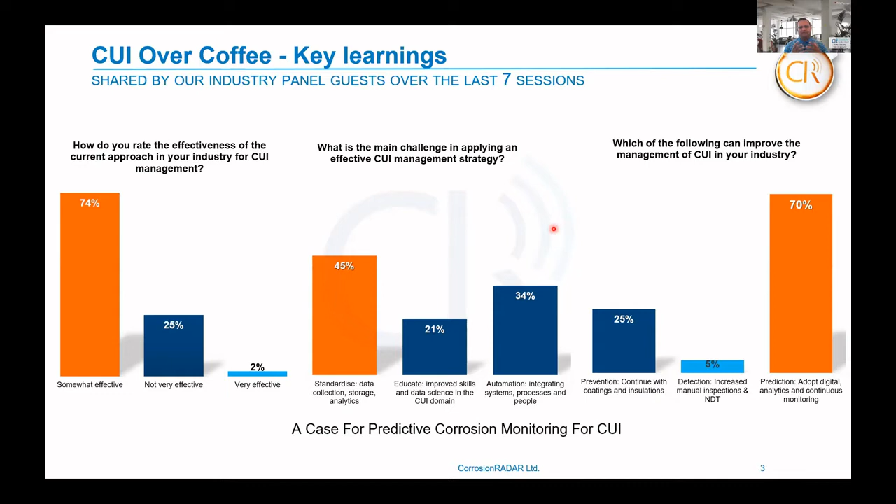So next slide talks about whenever a new paradigm comes in, innovation happens. So I thought this slide will talk about, are we into early majority or early adopters in predictive corrosion management? Has predictive corrosion monitoring for CUI finally crossed the chasm? Chasm is a gap between an innovation and early adopters and early majority. So have we crossed this chasm?

So I would request Shiraz to actually talk about adoption, how we are seeing the adoption of CUI monitoring and predictive CUI monitoring. Have we crossed the chasm? Are we about to cross, or are we in the early majority or early adopters? So that's what we will discuss today, a case for predictive corrosion monitoring for CUI.

So with this, it prompts me to ask Shiraz a question. Shiraz, there has been so much discussion around this topic of CUI and monitoring and prediction. Some people feel that it's at the early stage right now, some people feel that it's been adopted. Where's the line? So I would like to ask you this question, and through some slides show to the audience, where are we on CUI monitoring and prediction? Has it been deployed? Have there been cases studied, and how is the adoption going on? So Shiraz, over to you with this question.

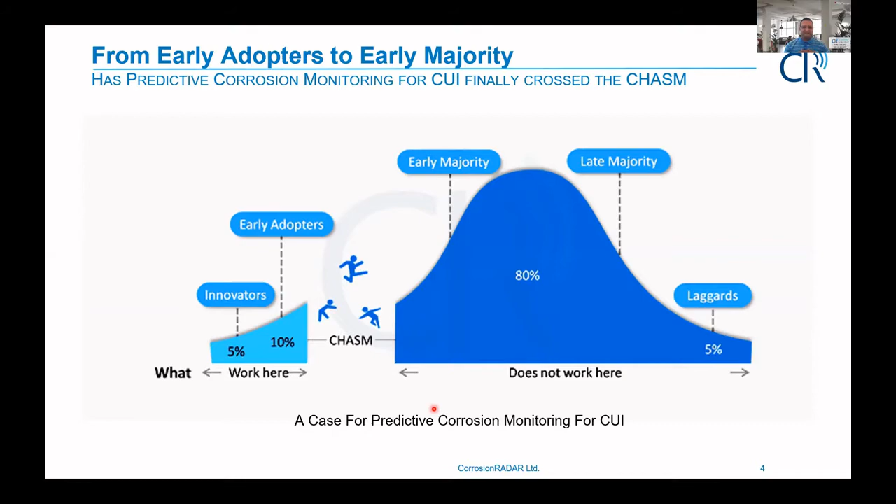I think we have - I can't hear Shiraz. Shiraz, are you there? I think the mic is muted, Shiraz, so you may unmute it.

Thanks, Praful. Yeah, I'm just going to share my screen. I prepared a couple of slides to exactly answer your question. I hope you can see my slides. Adoption, especially for CUI - I think it's time for adoption. The industry has been suffering from CUI for a long time. We have been using the same process for over decades, and I think now it's the right time to use a new approach.

So to start, I would like to share with you a story. Probably some of the audience here will recognize themselves; some of the panelists will recognize themselves in this story. It's a very simple story that happens probably every day all around the world, where you have Rob and Bob in a refinery or plant talking about CUI. So this is how the discussion goes.

So the boss asks his inspection manager, Rob, what is the biggest asset integrity issue? Rob, of course, answers, it is corrosion under insulation. Then Bob, again, very surprised - and this happens all the time - says, 'Oh, I mean, we have coatings with 20 years lifespan, we have good insulation, reliable NDT, good RBI practices, and we're still talking about CUI problems.' And Rob said, 'Yes, Bob, CUI management is still very difficult with limited budget and resources.'

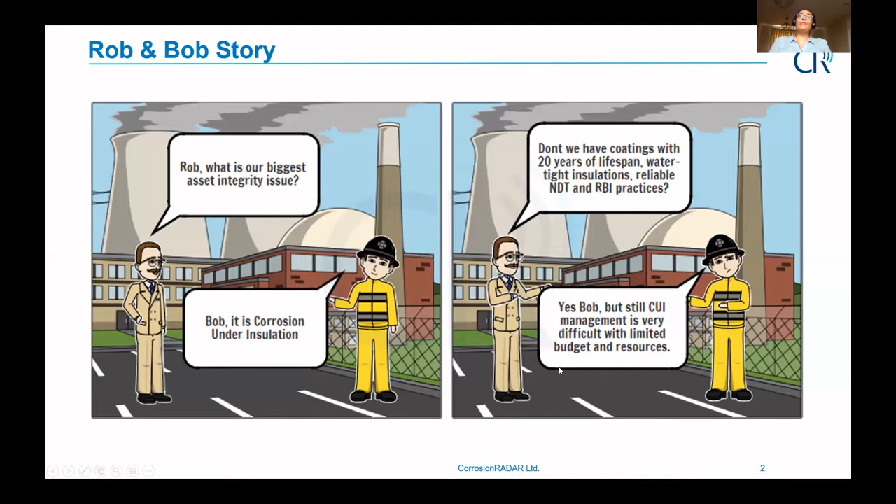So this just captures the problem that we see every day in the industry dealing with CUI. And just to support that with some numbers: CUI is the number one asset integrity issue in oil and gas and petrochemicals, and 60% of pipeline failures come from CUI. This is from public information, but also some of the panelists we had during the 'CUI over Coffee' sessions also mentioned big numbers like this. And just to take, for example, offshore platforms - 10% of the overall maintenance budget goes to CUI. So CUI is a big problem. Corrosion in general is the biggest failure mechanism, and CUI particularly is a big problem, and it is time to do something about it and adopt a different approach.

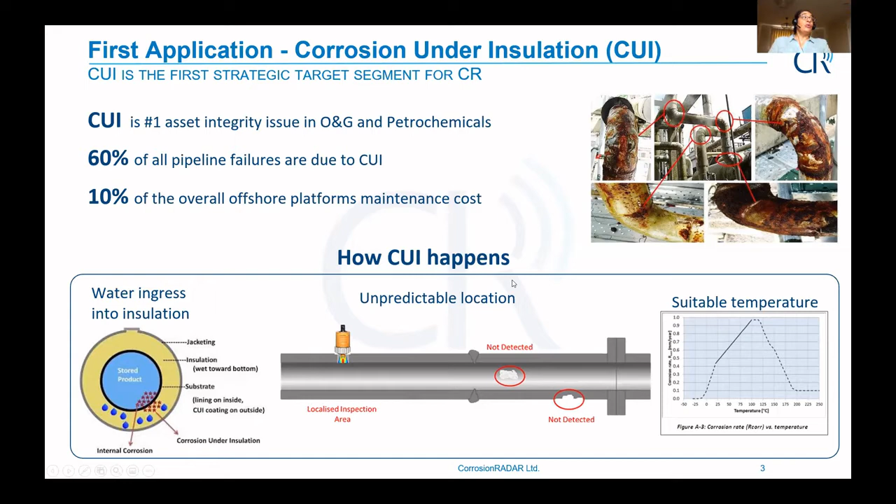So why is it the right time? Because I think the inspection, NDT, and monitoring technologies are ready to support this new adoption and new move. So I'm going to take you through a little bit of history of inspection.

This is a CorrosionRADAR slide, what we call inspection 1.0 to inspection 4.0. We classified how inspection has evolved over time. Inspection 1.0 is when we used manual observations and leak detection. It's very, very basic.

Then it moved to inspection 2.0, when we had a little bit more development in the instrumentation tools we can use, still heavy on visualization. Then it moved to inspection 3.0, which is more based on statistics, RBI, risk-based inspection. And now it's the era of inspection 4.0, enabled with technologies to move to automation, more predictive and analytics-based inspection.

That helped us move from manual to automated, from detection to prediction, and from reaction to prevention. It is the right time to adopt a new way of dealing with maintenance, specifically CUI maintenance. And that is exactly what we are doing at CorrosionRADAR.

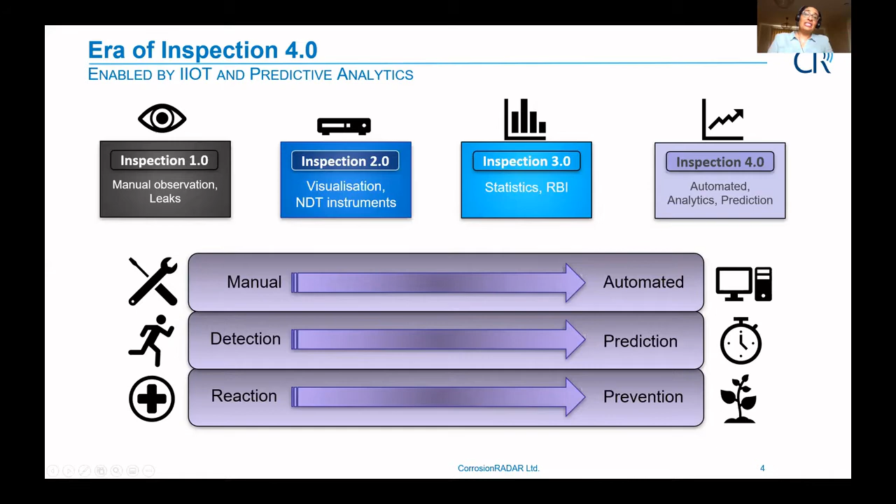We are supporting and enabling this move to asset digitalization and CUI management digitalization, through a system or solution that has three parts: what we call detect, connect, and predict. Detect is based on the hardware.

It's a number of sensors that we offer, developed in-house. We have corrosion sensors, we have moisture sensors, because moisture is the biggest problem that leads to CUI — moisture trapped in the insulation leads to CUI.

But we are also working on other types of sensors for coatings, and other sensors to enable us to detect, prevent, and predict how CUI can develop in different types of assets.

Then connect — as I said, this is inspection 4.0, so we want to make the system wirelessly connected, for remote inspection. And predict is really how to use all this valuable data we get, in order to move from reactive to predictive CUI management.

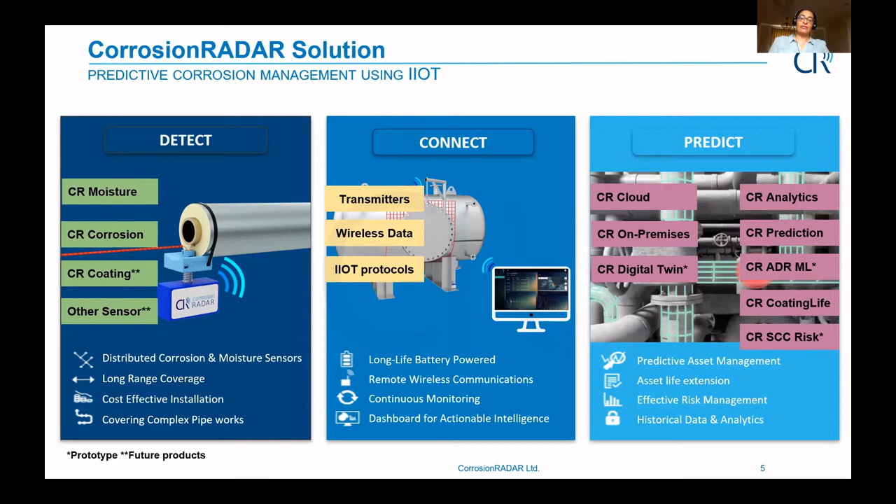So this is how a typical CorrosionRADAR system may look on a type of asset. It is modular. It can be installed on pipelines in a coiled configuration, helical configuration, or straight line — for example at the 6 o'clock position, where normally water settles in.

It can be designed in a mesh configuration if we're dealing with a big surface area. So it's very modular and flexible. It is designed to really give you two very valuable pieces of information: where and when CUI is happening. So you have a risk profiling of your assets, and a condition-based inspection, rather than blindly going every cycle to strip the insulation and do the inspection.

At that time, it may be too late, it may be too early, and in both cases it's a lot of cost and risk involved.

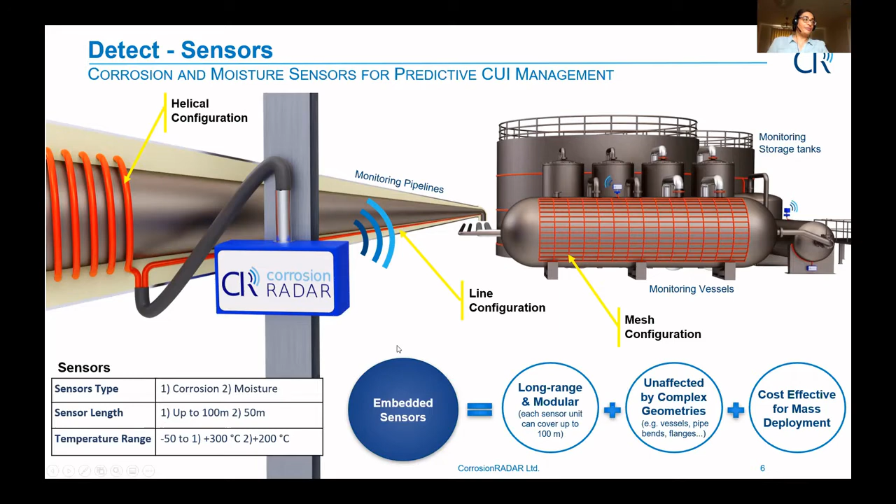Here's a very typical case where this is a brown field — the system can be installed for brown and green field. This column suffered a lot from CUI in the past, and during a turnaround, the client decided to adopt a new way of doing things, saving costs and also increasing safety.

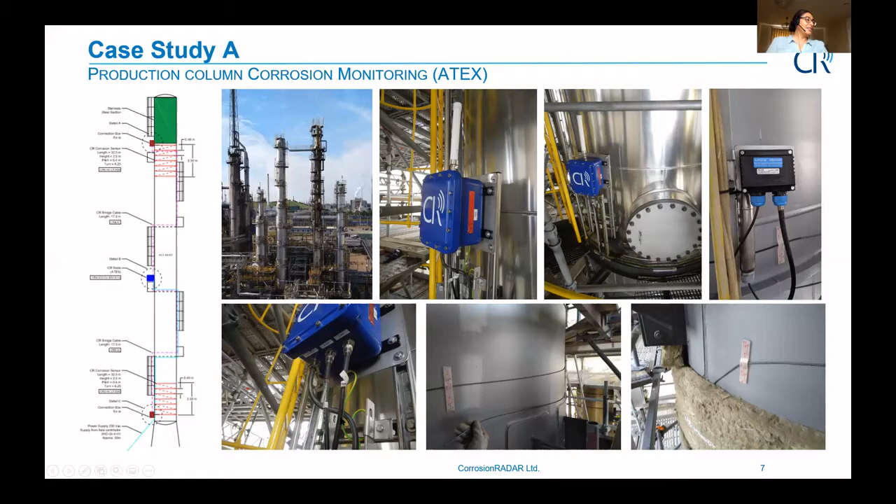My second example — if I can move the slide — is again a brown field. This is a complex pipe network where a section of it has suffered a lot from CUI.

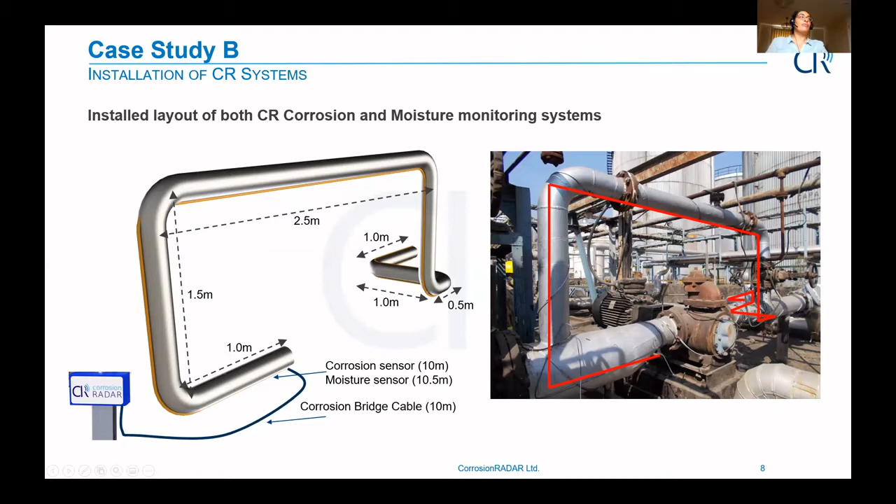The client decided to install both corrosion and moisture sensors, and I will show you in this slide the results from both sensors. So after 9 months of installation — the assumption here, of course, is that you have the best coating and the best insulation.

But after 9 months, we have seen, if I take the moisture sensor results — if you could see where I'm pointing here — that on that pipeline we have detected the presence of water pretty much everywhere in the pipe: on the top, and in the low points where the water settled in.

And if we also analyze the corrosion data, we have seen that at the top of the pipe, we have started seeing a level of CUI, and also at other points, lower points in the bend, we start seeing a level of CUI. So the key learning here, when the pipe has been coated and a new insulation has been put, the assumption from the client is that we will only inspect this pipe after 5 years. What we are showing them with real data is that within the first year, you have pretty much water everywhere and a CUI process has started.

So maybe if you wait for the next 5 years, maybe there is no pipe left. What we are trying to do here is give data for more informed, data-driven decisions. So the decision could be to prevent this altogether and reseal and look closely at the insulation, or shorten the inspection cycle from 5 years to 2 or 3 years. This is to prevent and to predict how things can evolve, for the client to make decisions based on real data and prevent a lot of cost for repair and safety problems and unscheduled shutdowns if CUI really leads to that point. So these are my slides to answer your question, Praful.

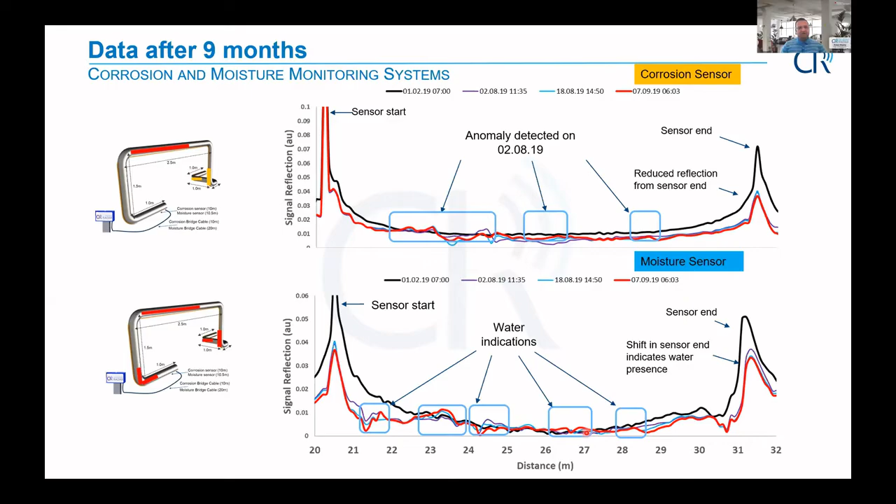I hope that covered all the questions that you asked me. Yes, thank you, Shiraz, for sharing that, how CUI monitoring has been getting adopted in various assets. My takeaway from this is, yes, this is happening, and I will question about where are we in the chasm of CUI monitoring adoption, and that will be a question to you.

And when you talk to various end users, oil operators, what are the main assets where they see the usefulness of this, and what is the plan in their mind? How does a typical process adoption start?

Yeah, Shiraz? I think that there is a big awareness that CUI is a problem. The question is, is there an appetite to change it or not? That will categorize the company into two categories. Some companies are really proactive about it, because CUI is a long-term problem. Some, they see the short term of it - okay, it's not my problem, it may happen in 5 years, it may happen in 10 years, I'm not going to be proactive about it.

But we see more and more companies really willing to change this because they realize a lot of aging assets are suffering from this problem now as we speak. And there is more appetite to take a different approach.

Aligned to that is all the development that has been done in the digitalization world - better sensors, better ways of transmitting data wirelessly, better signal analysis techniques that have been developed. So all those enabling technologies make the adoption cheaper, hopefully, than comparing to what it was 10 years ago. And we see more and more appetite to do that.

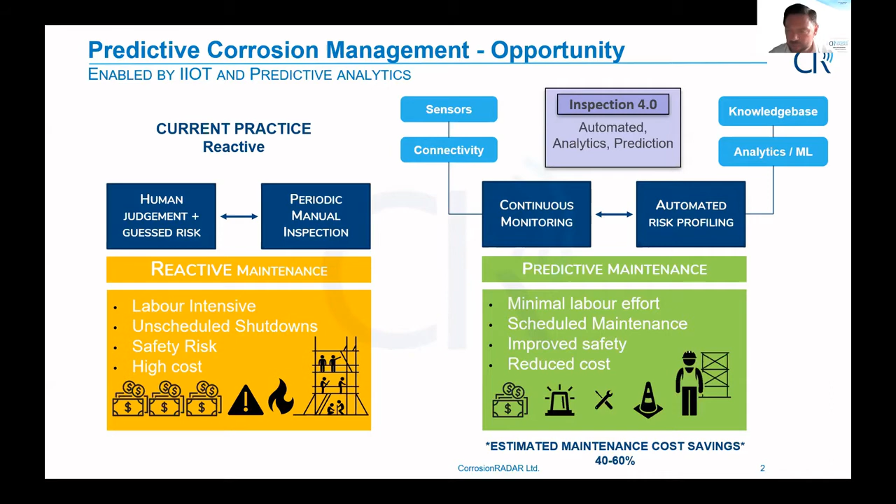And if we move on to targeting the actual business cases - we've talked to many operators and different people within plants, and what we've got to do is we can't just put sensors everywhere. It's not a big bang approach; we have to be highly targeted and prioritized. Fran from Plant Integrity Management, in one of the CUI coffee sessions, said we need to look at the fabrication and maintenance strategies, and the risk-based inspection tools, to define where we start putting and rolling out the sensors.

And when we're talking about brownfields, we are retrofitting the installation, so we need to work around those schedules, but it needs to be highly prioritized. So what we are seeing, and Shiraz mentioned a couple of customer cases, is companies focusing on high-value and critical assets like production columns, where it's difficult or costly to inspect or need regular inspection. Of course, conditions are a big factor too.

We're talking to plant owners and people in those plants who recognize that due to various different conditions, it's really driving the unpredictability associated with CUI. So we need to think about where we target the business case analysis and where we target deployment of sensors. We talk about green and brownfield sites.

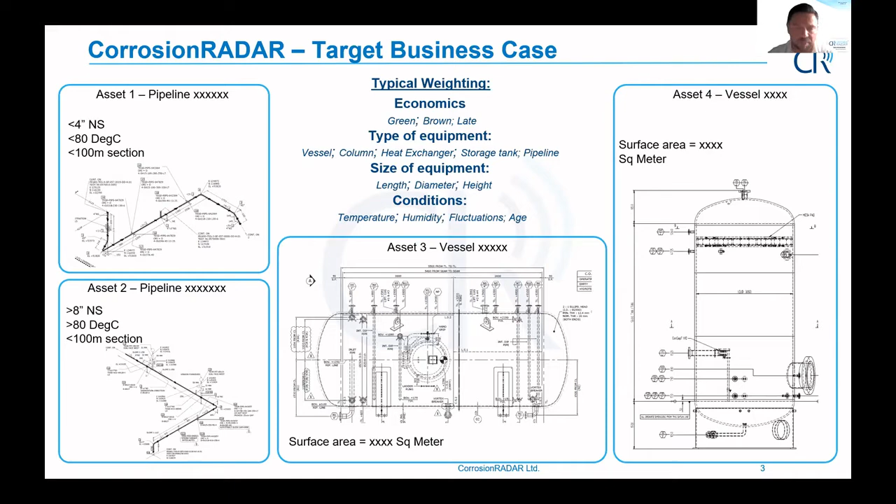But this is something we are working with our customers and prospective customers on at the moment. We go through a cost-benefit analysis, something which we recognise we need to help companies on, and through consultation we take various inputs from those companies. One obvious tangible hard saving we can focus on is how do we optimize inspection and maintenance?

How do we reduce partial stripping every 4-8 years, which is 15 or 20%, or even more in some parts of the assets, down to say 2%, and what is the cost savings associated with using corrosion radar sensors? That's been quite successful. It takes a bit of time and effort, but certainly we can demonstrate tangible and hard savings.

But of course there are other benefits associated with the ability to precisely detect where and when there's corrosion in the insulation. That early detection can certainly help reduce and eliminate loss of containment and production loss associated with CUI. Many operators have been open about this, and they've looked at their historical data and identified the average loss of production associated with CUI, and we've been using that information to start really building out the business case.

That's the type of information that really gets the attention of executives, because when there is a disaster - a zero unplanned shutdown, sometimes catastrophic - that gets their attention, and we can put numbers to that. There are obviously lots of other benefits too, in terms of increasing asset life, optimizing asset performance, and increasing inspection intervals - rather than doing a full strip every 12 years, maybe you can extend that to 15 years or beyond, or just keep it at precise inspection.

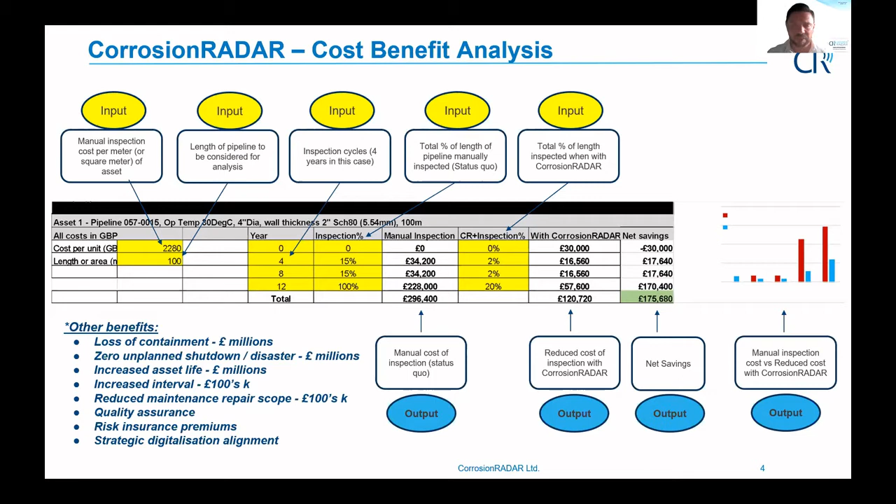So there's lots of benefits associated with this, and in the way that we can look at the business case, this is just an example. Some work we did - and we have to anonymize the data - but we looked at 4 assets over a 12-year cycle, at 4, 8, and 12-year periods. The total savings, just based on optimizing inspection alone, was substantial.

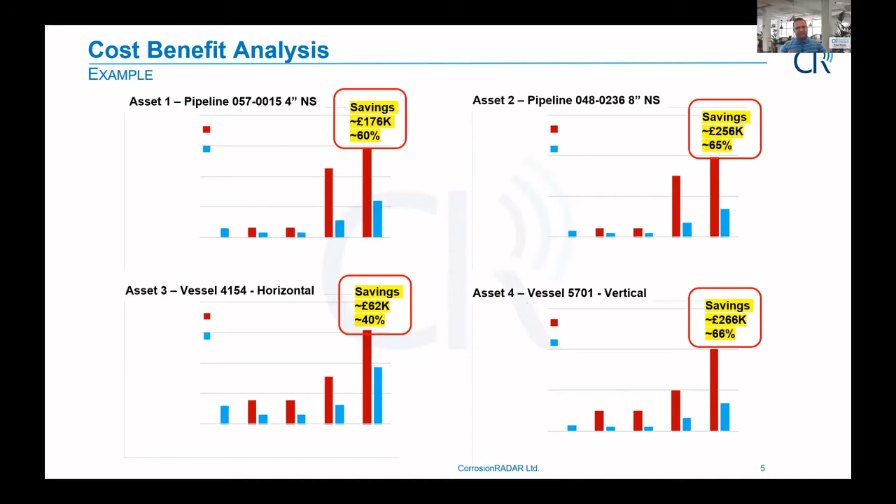So James, thanks for this use case. What I take away is normally you get engaged with the end user about cost benefit analysis, and it's done from the inspection cost savings by reducing the inspection locations - rather than blind inspection of a whole lot of locations, very targeted inspections, be it visual or NDT, but NDT will be required for verification, right?

And the second thing I take away is the numbers you've shown are just from the inspection cost savings, but there's another level of quantification about loss of containment savings, unplanned shutdown, which is pretty much a discussion with the end user. So there's much more to that, and the saving from inspection alone is about 40 to 60% for a typical asset over a life cycle.

So from this, what is the typical process, James? My question would be, how will the customer know whether they should do the cost benefit analysis, and how do you help them? What are the inputs you need from them?

It's a good question, because you need to find that emotional driver within the company. By creating awareness across the inspection and maintenance community within an asset integrity community within a company, you will get one or two people that really get it, and also have the emotional driver to say, I want to do something, I want to change.

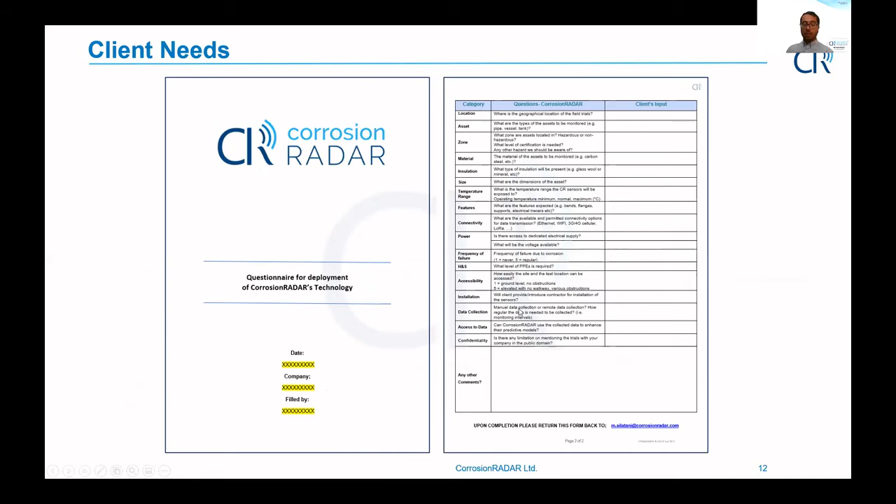The first step is the client need. After the decision is made, what we share with the client is a simple questionnaire about the location, the asset type, the zone it's located in, what sorts of insulation is used, all the way to considerations around data communication and accessibility to that asset. All of that will be captured in a questionnaire like you can see here.

Once that is captured, the corrosion radar team works on producing some sort of design and a simple schematic to explain to the client.

To understand the future slides and content I'm going to show, I'd like to spend a couple of seconds on this slide, explaining for those of you hearing about this for the first time, the corrosion radar system components.

The corrosion radar system can be thought of as 3 main components: you have the electronics, called the CR node; you have the bridge cables that transmit the data to the proximity of the sensors and get connected to the sensors; and then you have the sensors installed on the asset. So 3 main components: electronics, bridge cables, and sensors.

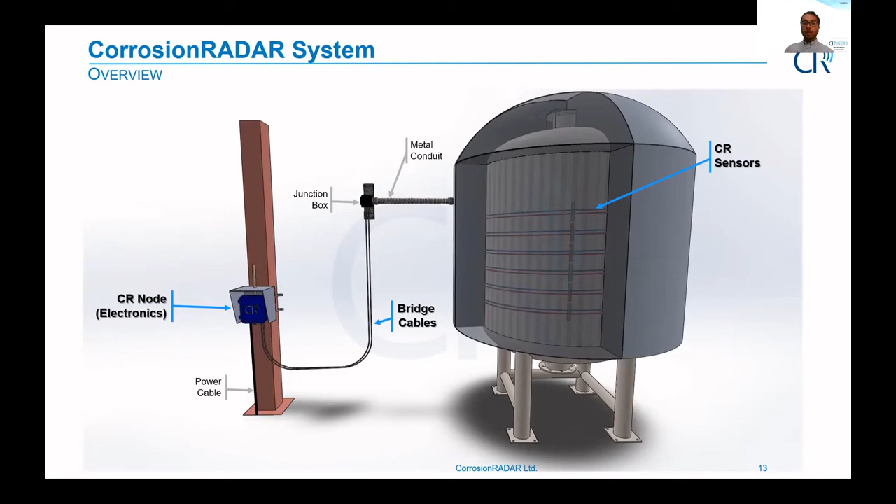Once we have an idea of the schematics and how the design would look, we move on to produce very detailed drawings for the clients. This is done in consultation with the engineers to make sure every detail is captured, leaving the minimum amount of work left to be done on the day.

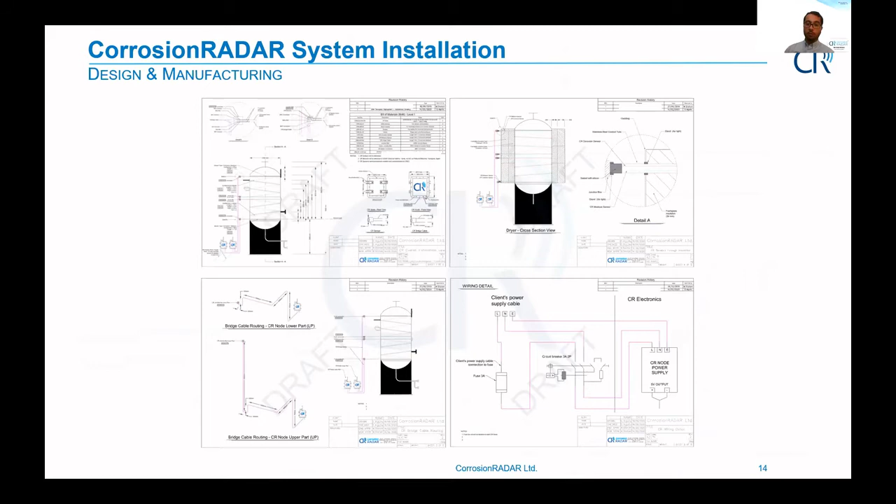Once all of this is done, we move to the manufacturing step - capturing all of the data and requirements and moving on to create our system. The biggest component obviously is the electronics, which we call the CR node, represented here with pictures.

They come in different communication options: wireless HART, LoRa, cellular, or offline USB connectors, for this particular example.

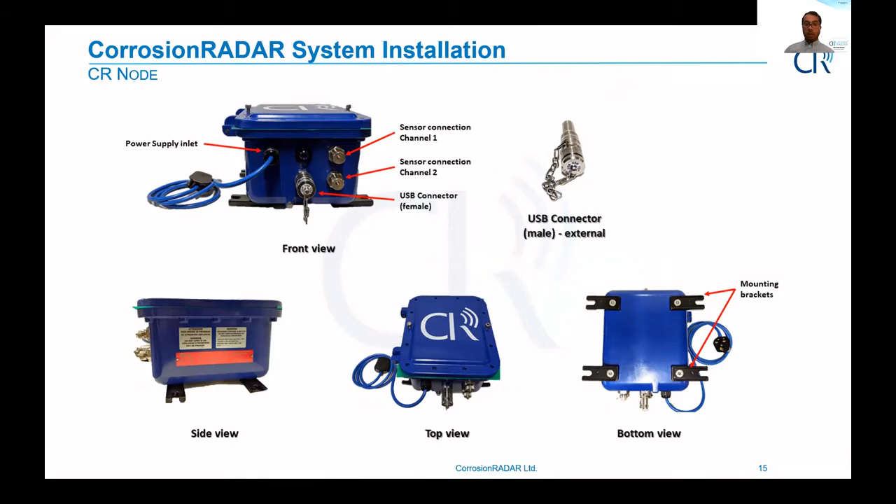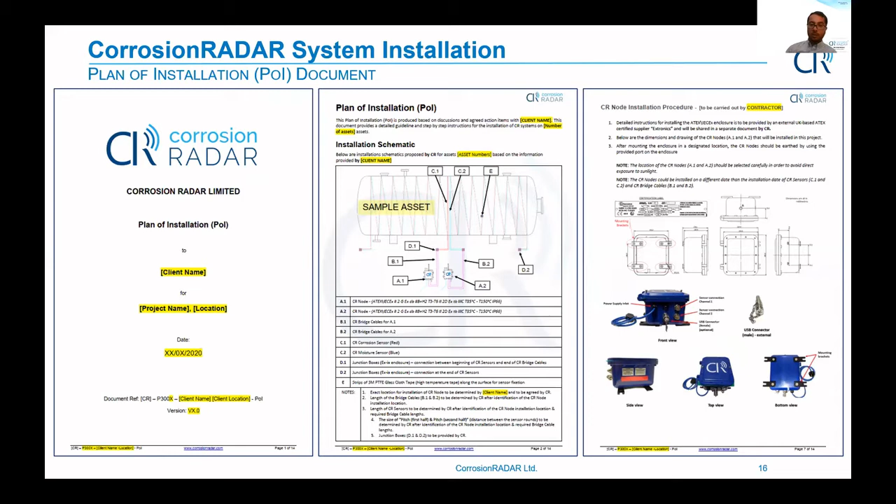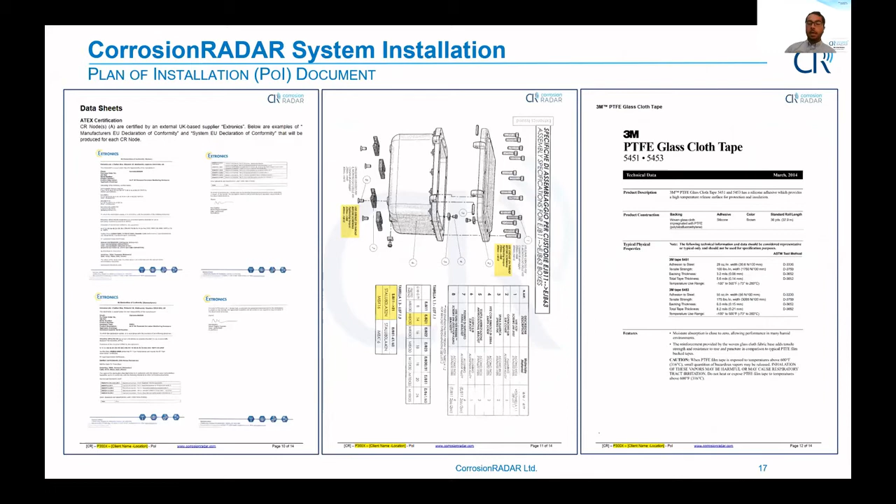Once that is done, the next step is helping the clients understand step by step the process needed to get the system installed. We provide a document called POI, Plan of Installation, which goes through what needs to be done and what considerations need to be taken once you want to install the system, from the point of unpacking to the point where your technicians install the sensors or electronics on the asset. Alongside that document we provide certifications of our Corrosion Radar products and the mounting equipment we use, as well as data sheets for the peace of mind of the clients.

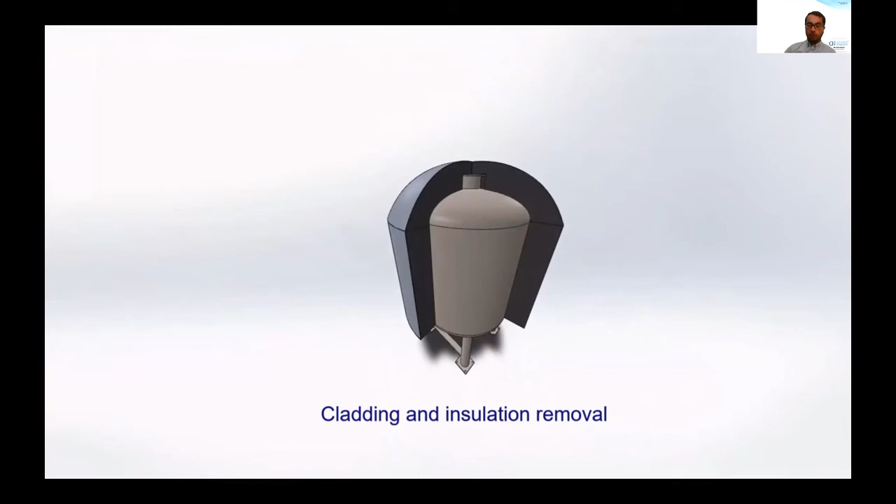Once you've covered those aspects, you move into the deployment itself. To help explain this, there's a short video we usually provide to clients. In this case, you can see the installation of Corrosion Radar systems on a dryer or a vessel, where the foam glass insulation is removed.

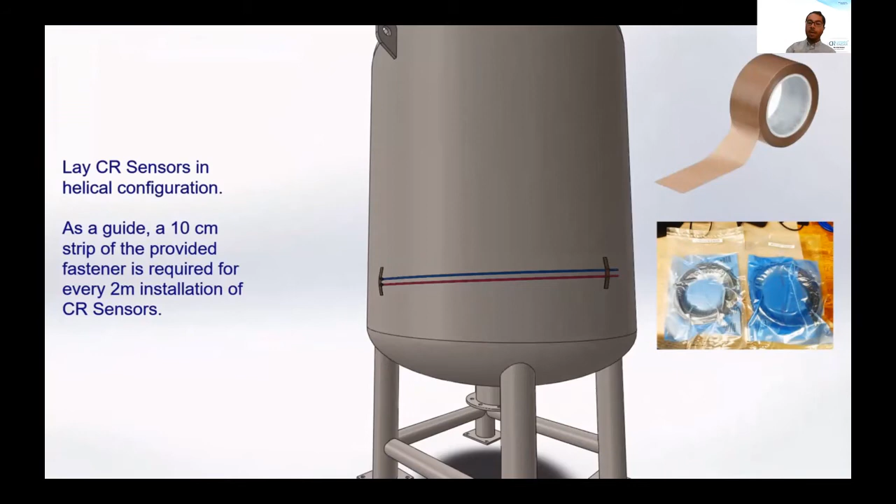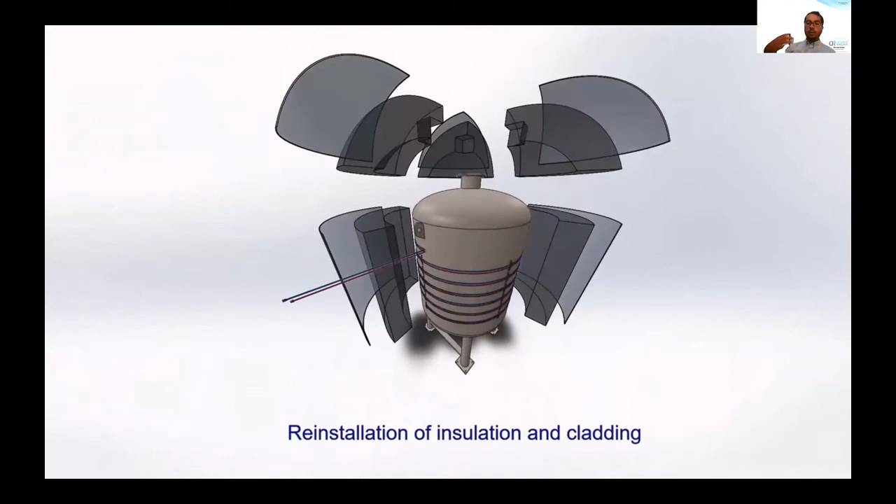Then you put in the sensors, which come pre-packed, as you can see in the pictures, corrosion or moisture sensors in the form of a wire. It's a very simple installation: you identify the layout you want, put glass fiber tape on the sensors, and wrap or mesh the column depending on the configuration decided as optimum for monitoring. Once that's done, the insulation goes back on, and the sensors are guided through to the outside with sealed glands.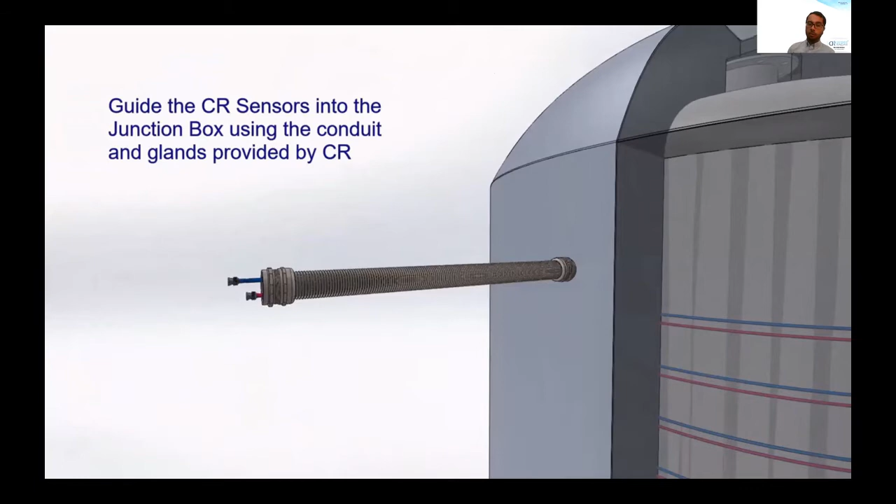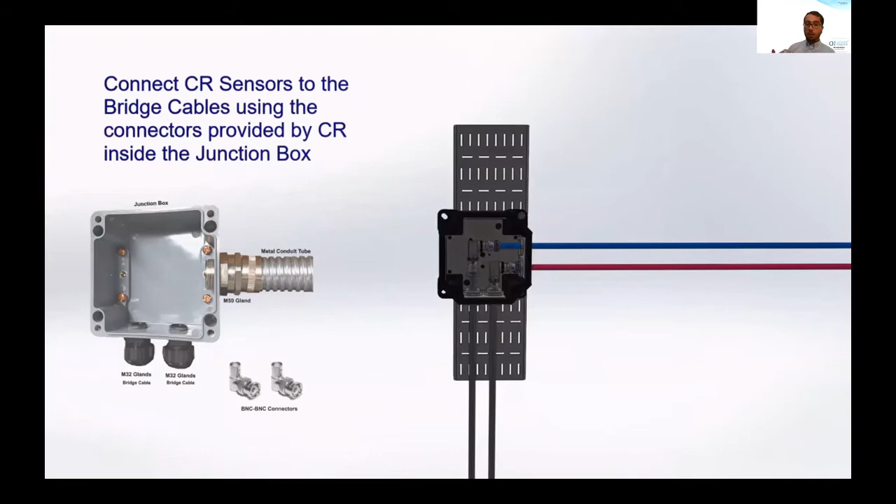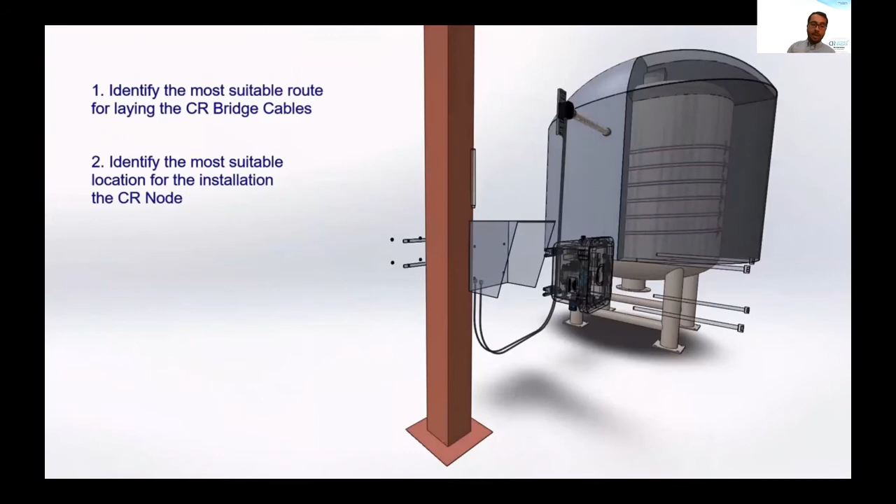We don't want to create another point of water entry into the installation, so we have mechanisms to avoid that with the type of glands and sealings we use. Then there's a junction box that connects the sensors to the bridge cables, as you can see in the video. The beauty of this is that the bridge cable provides flexibility for where the sensors are with respect to where the electronics can be. Often your column is 40 meters or 25 meters, and having electronics installed at that height can create logistical challenges, so bridge cables solve that by letting electronics be far away while still connecting to the sensors.

Here you can see the electronics again. The bridge cable connects to the electronics in a very simple installation, with bolts and nuts fixed to a structure. Then the power is connected, the bridge cables are connected, the system is earthed, and after that you have a complete assembly. That was an example of a vessel.

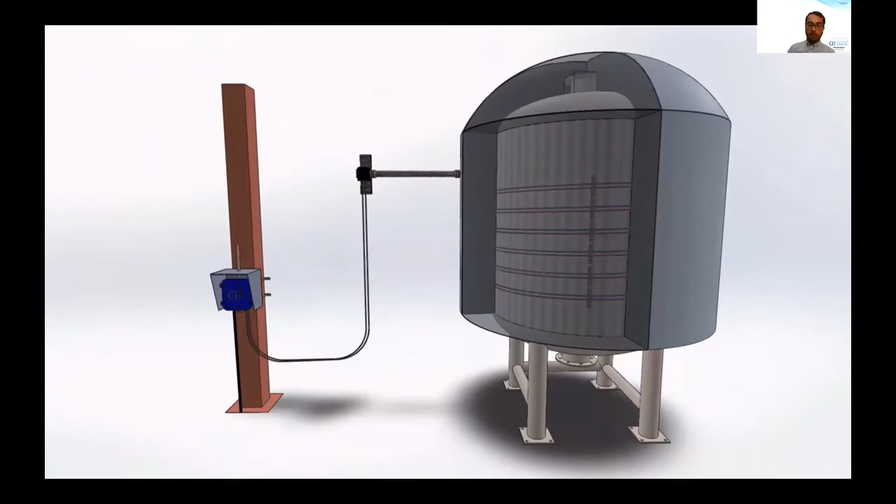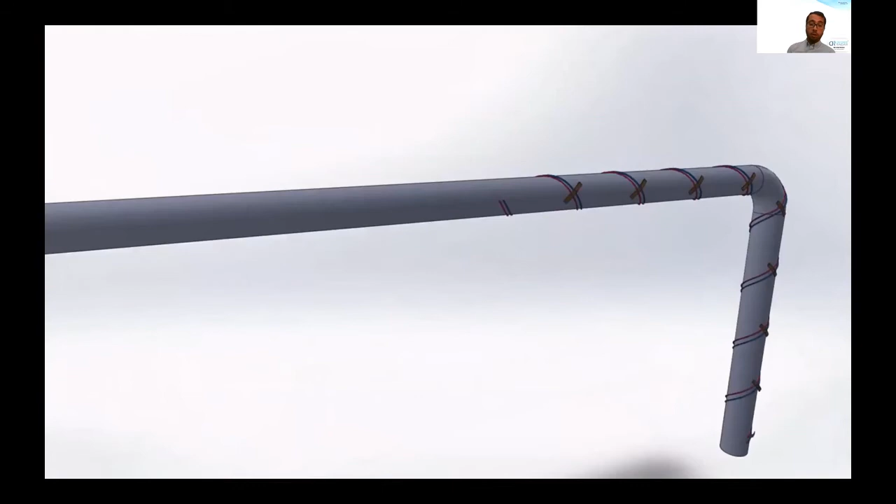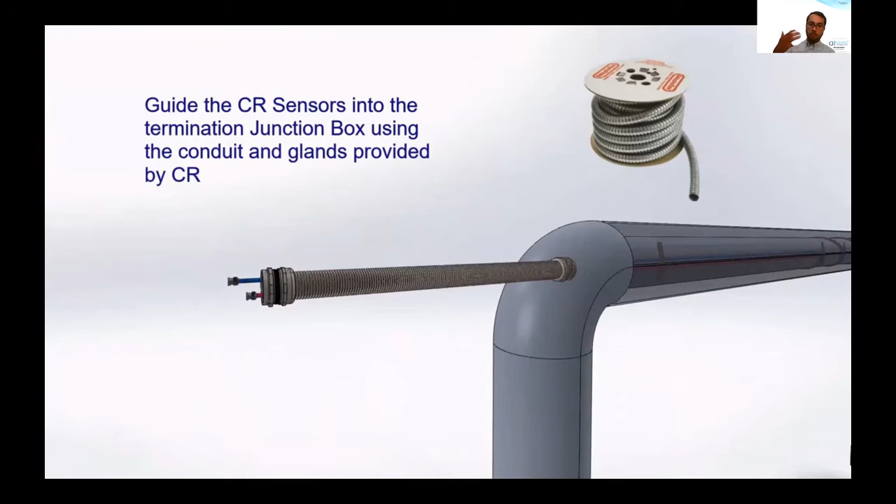If we move to an example of a pipe, it's not that different. Again it's a simple installation. If you decide to go with a helical fashion, sensors are wrapped around using cable ties or high temperature glass fiber tape. You can also have it in a straight configuration. Once you install the sensor according to the client's specification, the rest of the steps follow the same as the vessel, with bridge cables connected to the electronics.

That brings me to one example in practice of installing sensors on a production column. As our participants and friends know, from the point of a drawing to the point of installation there are always surprises. The beauty of a CorrosionRADAR system is that because it's flexible, we can face those surprises and work around them, whether it's a new inlet to the column not shown on a 30-year-old drawing. The sensors are flexible enough to go around it.

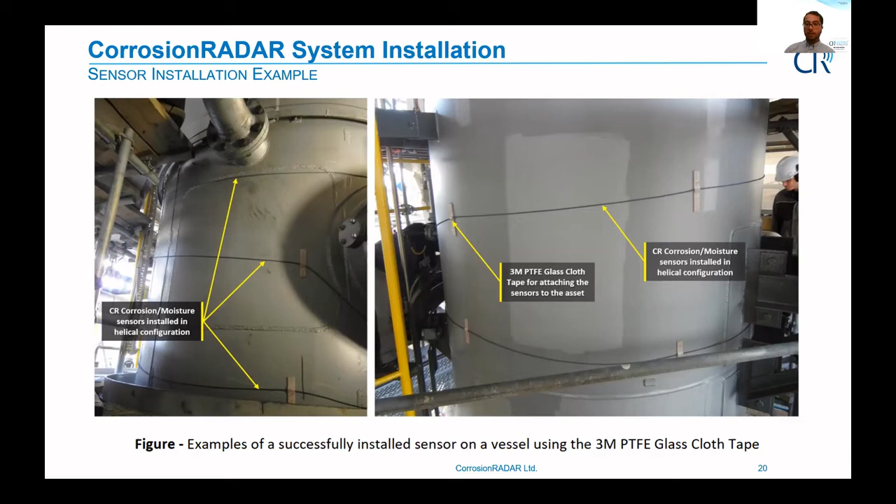Whether there's a new piece of instrumentation installed that we didn't know about, that's still okay, because the sensors are modular and flexible enough to cope with the situation present on the field. So that covers all the points from client needs to design, to manufacturing, to deployment.

Now the system is deployed, but what does it look like after that? To give a brief overview of the options clients have, which we advertise, there's the dashboard. They can also have on-premise solutions or other report mechanisms provided to them. But let's look at the dashboard.

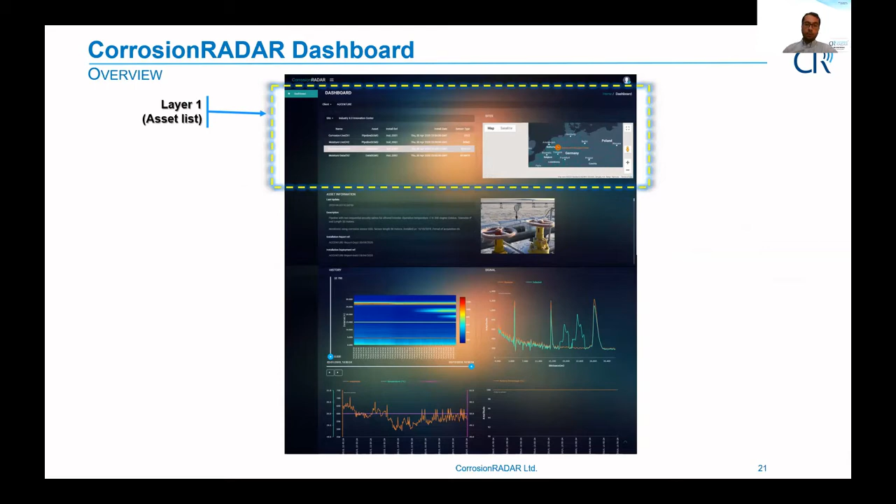So clients, the systems will start communicating the data back to Corrosion Radar servers. The client will be given a username and password, access to this Corrosion Radar dashboard. What they would see is a three-tier or three-layer dashboard.

First layer is asset list and asset information. For example, a client has a site in Spain, and a site in South Asia or America. They choose the site, the number of assets in there, and the particular asset they're interested in. Then they get a brief description of what that asset is, how it's been installed, and the last updated pictures of it. The third layer, which is the most important part, is the analysis.

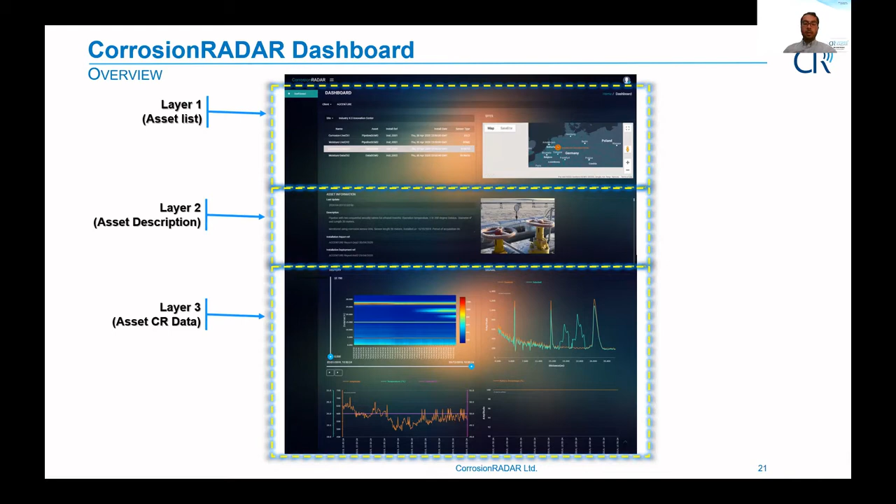So let's take a quick look at an example of what analysis looks like. The dashboard presents different ways to provide information. One of the ways is this heat map graph, which you can think of as a history of measurements compiled one next to another, creating a colorful figure. The figure on the left is the heat map of an example asset.

You can see at the end of it there are two small indications of something happening. So you have the start of the sensor as the first peak, the end of the sensor as the second peak, and then you start seeing a small indication of something happening after a number of days.

On the right-hand side, you can see the comparison of any particular point in time to the first data collected from the sensor, so you do these comparisons here. But what does that mean? You saw a peak, but what does it mean? What is that information to me as an operator?

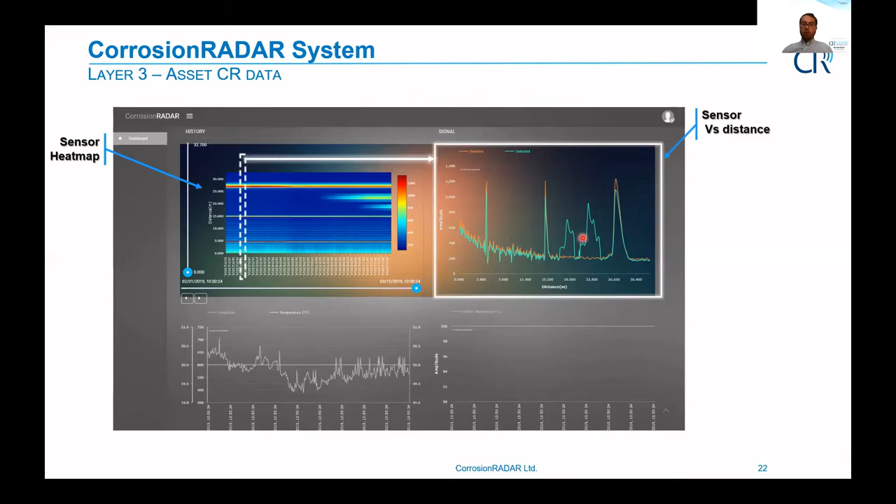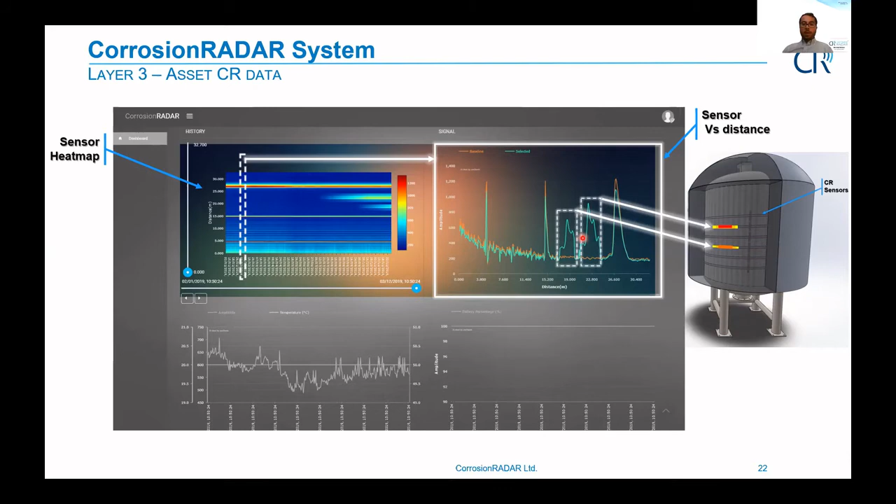So yeah, that is pretty much the journey to the installation and deployment, Praful. Thank you, Mehrdad, that was quite detailed. I think the engineers in the audience will appreciate how this is installed, and I think that was a very revealing, insightful presentation.

My quick question would be that the data you showed is actually raw data, right? Yes, very raw data. How much interpretation is required and how much processing is done after that? Very good question, that's correct. The data you saw was a raw data representation with a small, minimum level of analysis done on it. But the beauty of Corrosion Radar systems would not be to just look at that point in time.

So there are levels of analysis, Praful. The basic level was what I showed in the slides. It's still useful because it identified the location, but more and more analysis can be done on the data, which we offer to clients, and based on what they need, it is decided and given to the client.